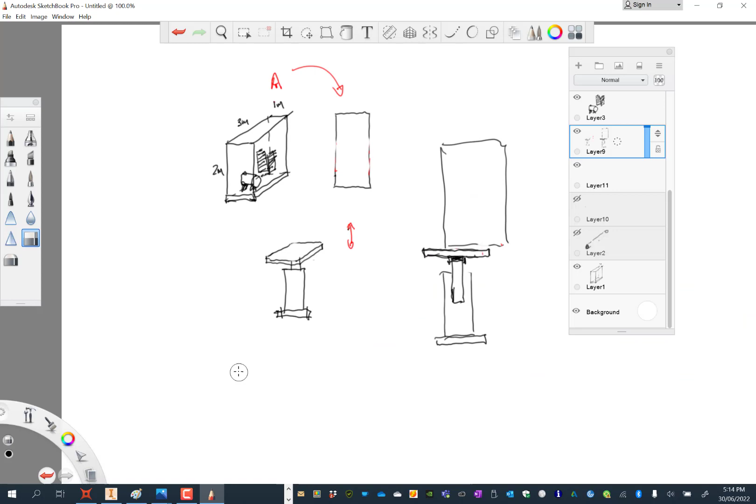So we're looking at one more way of finding the centre of gravity, this time just using a couple of scales. What I'll do first, let me just quickly review the different ways you can try to measure the centre of gravity practically. So we're going to learn a lot of mathematical ways to do it, but we'll have a look at some of the practical ways of doing it.

Let me just get rid of a couple of these layers if I can.

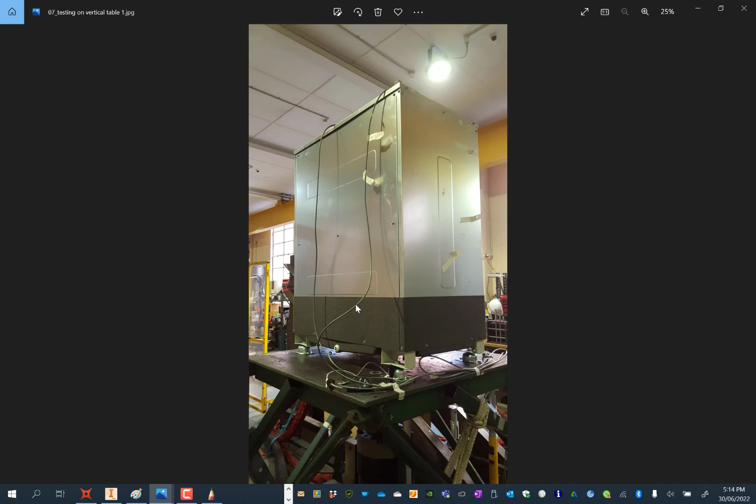Yep. So the first way we talked about, I did it with a phone box. I think it was my old phone box covered in duct tape. But you can put a roller underneath, and I've used this in the past when doing some earthquake testing. So just to give you a bit of background on that. And so what we do is we test these HVAC units. So that's heating and ventilation units.

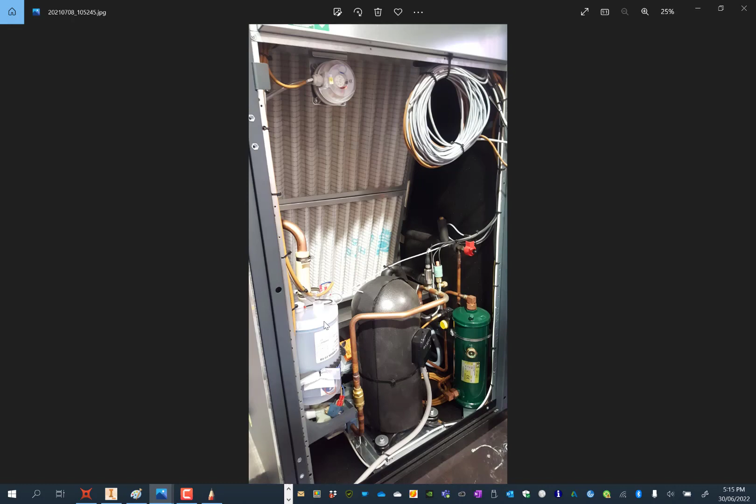And so what we do is we put them on a vertical shake table. So this table here, it's got a hydraulic ram underneath that shakes this up and down, and we use it to test whether these things will survive an earthquake or not. So one of the issues with those is that inside they're quite complicated. So that's the inside of this unit. It's got some filters that pass water through them for cooling the air, and it's got pumps and compressors and all sorts of things inside it.

And so you can't just assume that the center of gravity is in the middle of the box. You've got to actually find out where it is. And so one way you can do that is just the same as what I did with the phone box, the little box I was showing you on the video earlier. You can just put in there, let me just see if I can find the right layers.

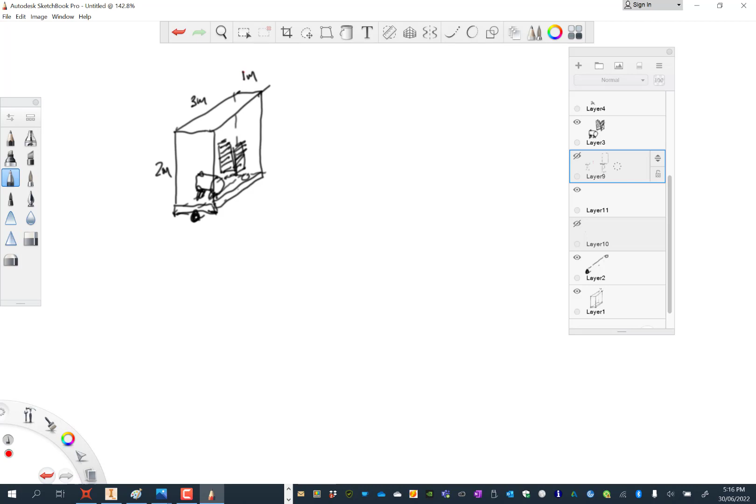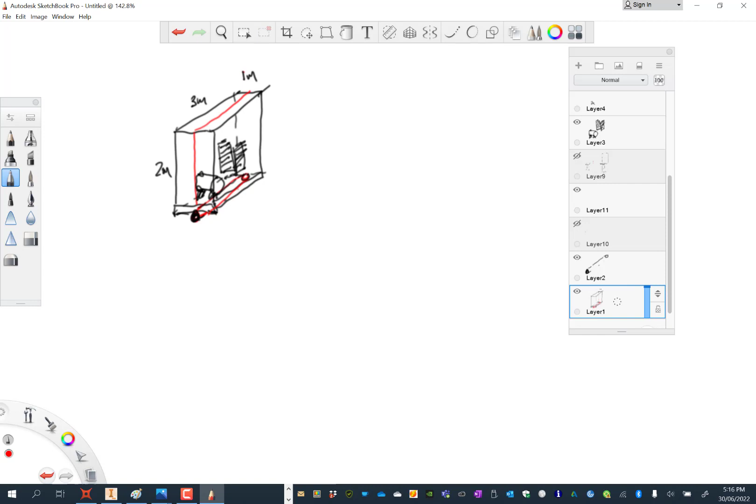Yes. And so you can put a roller underneath. So this is just representing the piece of equipment we're testing. So put a roller underneath that. This is the roller here. I need to select that layer. Sorry, I don't use this package very much. But you just put a roller underneath it like that. And then you just roll this backwards and forwards until you find the balance point. And then, just as we did before, you then know that your center of gravity lies somewhere on that plane.

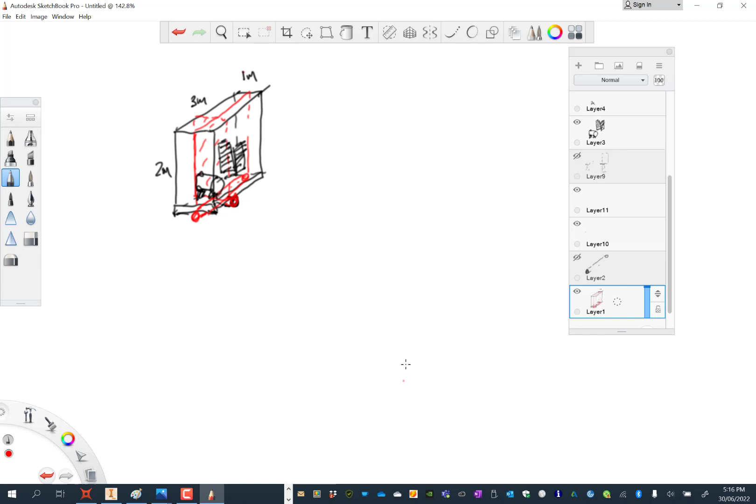Then what you do is you swap it around. Let me just see if I can find the one. There we go. So then you swap around, got another roller underneath the other way. Then you know the center of gravity is somewhere on this plane. And what we're trying to do in this problem is to find the center of gravity on plan.

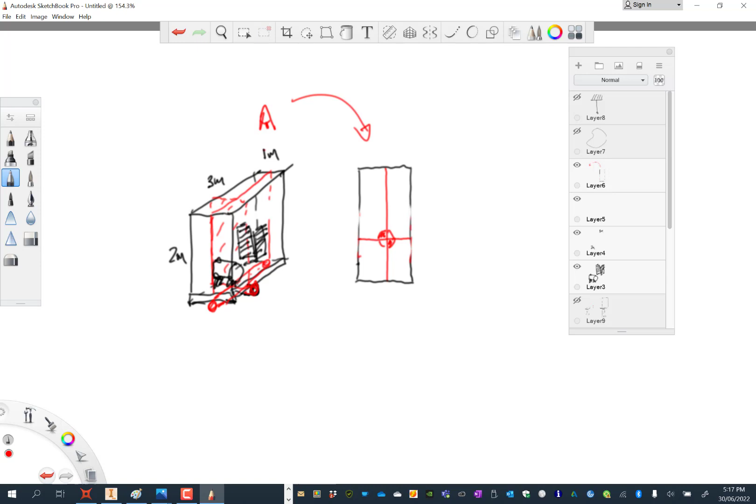So let me just see if I can find the right layer. So what we want to do is, if we're looking down on top of this, and we found those lines with the rollers, the center of gravity is here somewhere. And so I want to find the center of gravity on plan like that. The reason we want to do that is because we're going to put this on top of the shake table. Just bring this in a bit. So we're going to put it on top of the shake table.

Just get this flat. So this is the shake table, so you get your table like that, the ram underneath, and it doesn't have any supports other than the ram itself. The ram is holding everything up. And so if you put the center of gravity in the wrong place, and suppose your center of gravity is here somewhere, then the force from that unit is going to be coming down here. You're going to have a reaction from the ram over here.

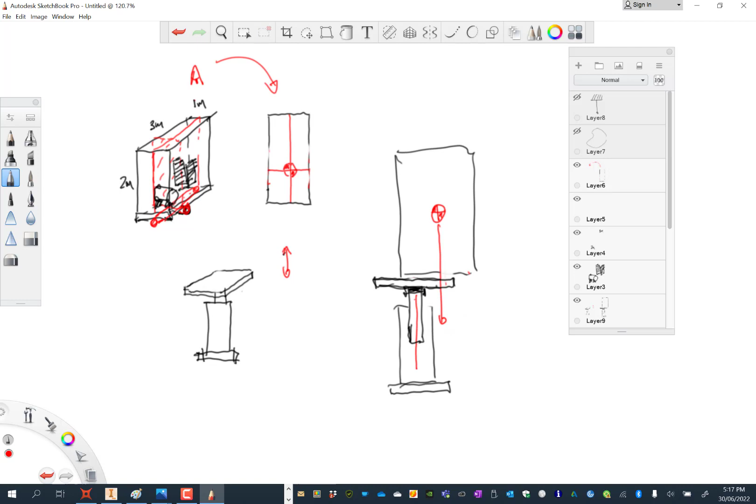So just as we were talking about before with resultants, you've got a lever arm, so you've basically got a couple, and therefore you end up getting a moment. And what that moment does is it puts a strain on the rod for the hydraulic ram. That rod's moving up and down to shake the table, and it'll wear it out on the sides where it runs through some bearings. And so we don't want to do that. So we want to find out exactly where that center of gravity is, so that we can make sure we're putting it square onto the table.

So that was the first way of finding a center of gravity. Just put a roller underneath, roll it backwards and forwards, find the planes, and then do it in another direction, find an intersecting plane, and then you can figure out where exactly that center of gravity is.

Obviously, we can't find the height of the center of gravity because we can't turn this on its side and roll it sideways. Usually you've got quite a stiff base, but the sides usually aren't very strong. But for this, it doesn't really matter where it is height-wise. You just have to make sure that you're putting it on the correct place on plan. So that was those.

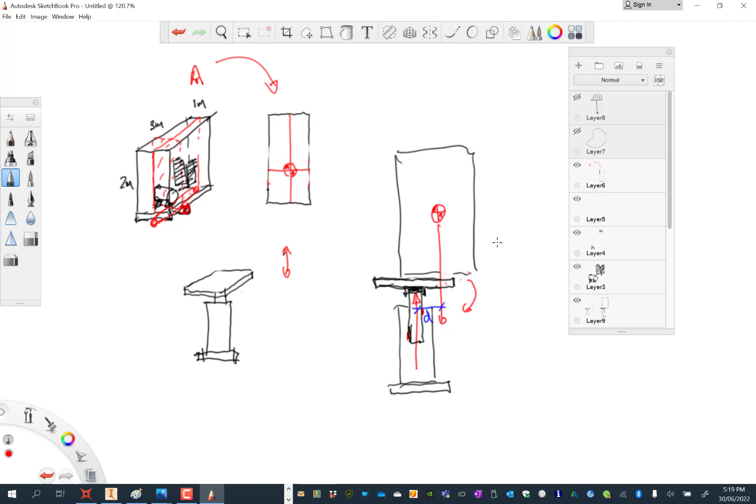See if I can turn all that stuff off. Interesting. Excuse me. Try and find them all to turn them all off. Come on, disappear. There we go.

Okay, the second way of doing it was to hang the object. Let me bring this round. So you hang this object one way or another, and then what will happen is, let me just see if I can get this to work. Not on the right layer, maybe on that layer. Why is it not showing me my dotted line?

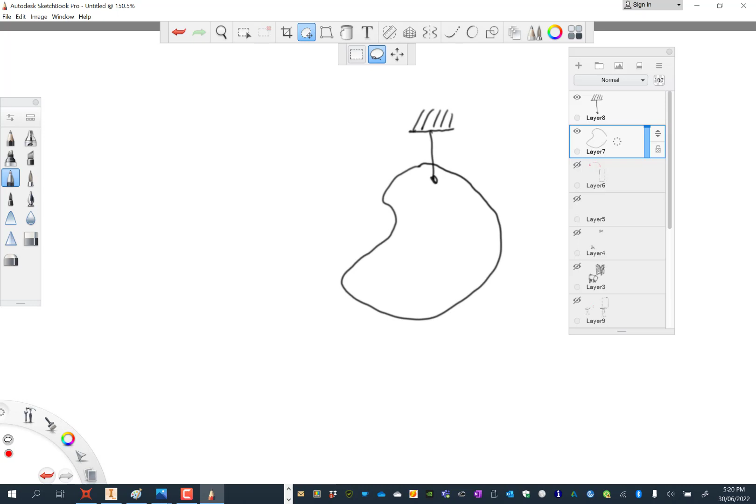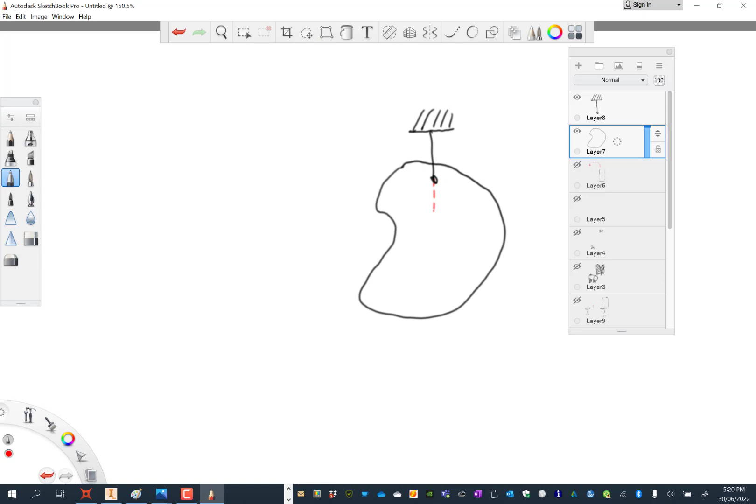There we go. So if you hang it from a particular point, it'll rotate around until it finds its balance point, might be around there, and then you know that the center of gravity must lie somewhere on this line, because it'll always rotate around until the center of gravity is underneath the support point.

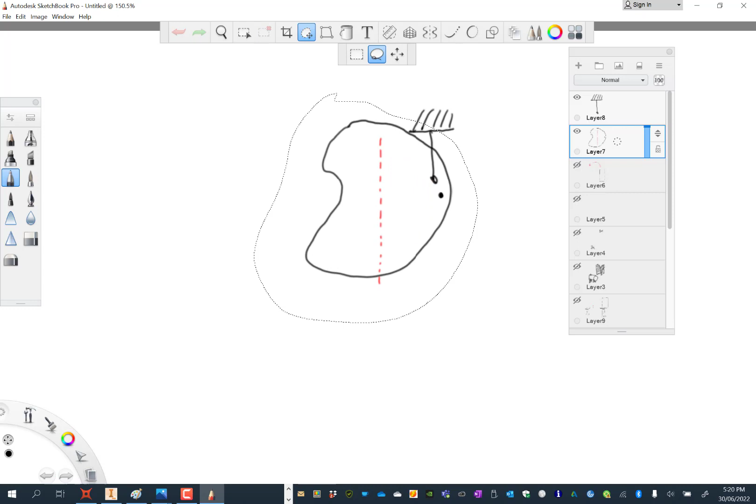Then you would choose another point to support it from, and you would attach it from there. And again, it would rotate around. Sorry, I'm not very good at choosing my center of gravity. So it would rotate around until it found its balance point again. So then you'd know the center of gravity must lie on this line.

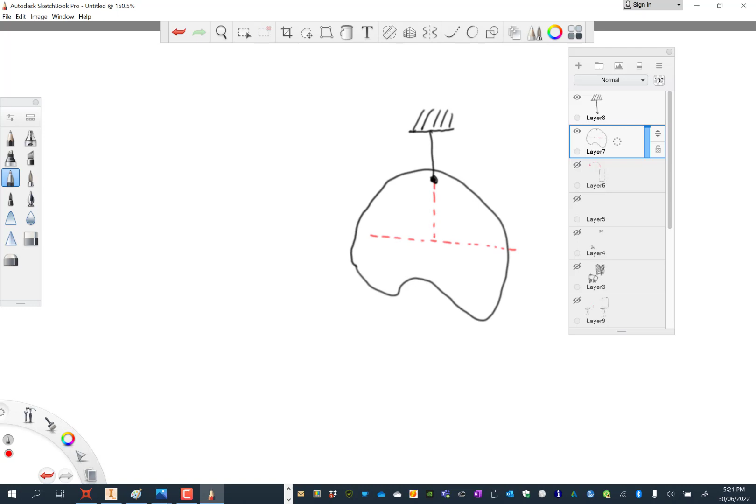What do I need to do? Get rid of that. So the center of gravity must be under the support point. So now you've got two lines that cross, so you know your center of gravity must be in here. And you find your center of gravity.

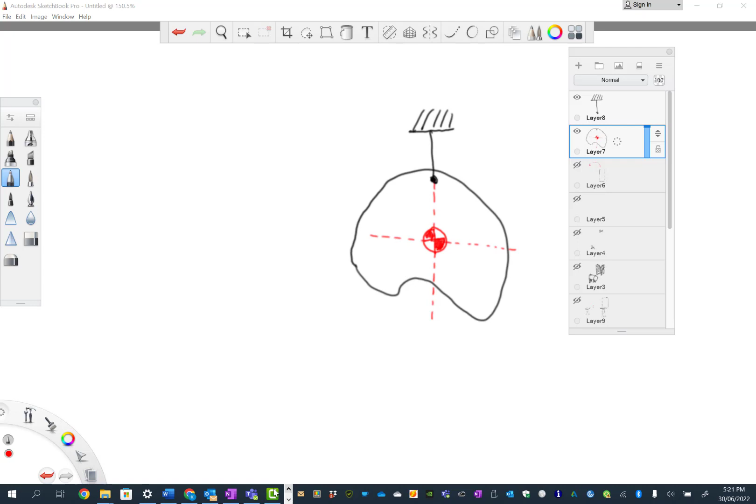So one other way we can find a center of gravity is to put a couple of scales on it. So this one here is this beam that we used as a test rig down in the labs. It weighed about a couple of tons altogether. The issue we had with that was we didn't have much headroom. The lab is not all that high. We were lifting it this way. The little head was downwards.

And so when we were putting it in position, we didn't have much space between the hook and the beam. Usually, if you did have a bit more headroom, you'd have your hook up here and you'd bring your slings down to lift it up. And that way it's not quite so critical where the center of gravity is. You can kind of move the hook back and forward along the slings until you find that right point.

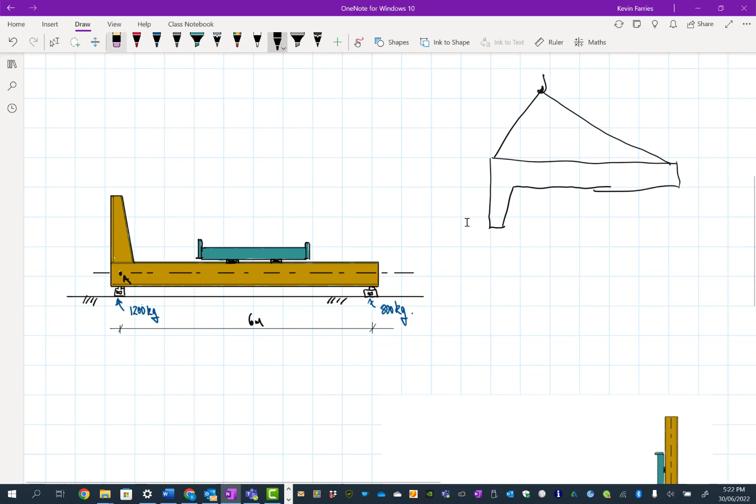Because we had so little headroom, the hook always needed to be quite close to the beam, so we couldn't really use big slings, so we could only really attach at one point. And to make sure it rotated flat when we lifted it up so we could get it into position, it actually sat on top of a couple of rams as well. We needed to make sure that the center of gravity was exactly under that hook. So we had to make sure we had a lifting point here. So what we needed to do was work out the center of gravity.

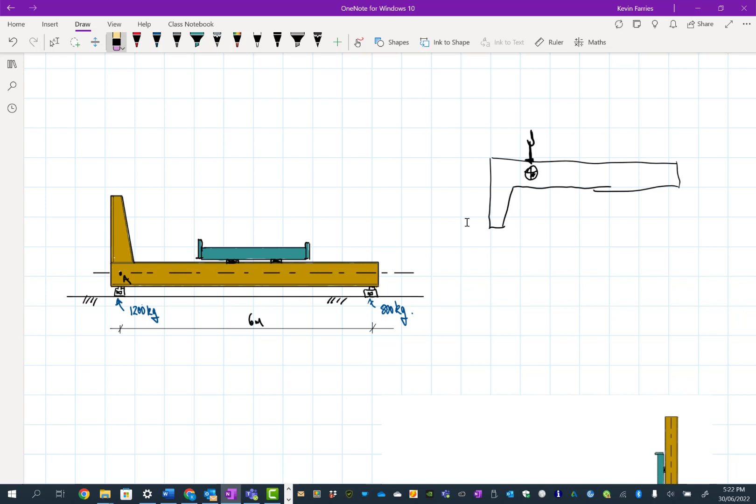What I actually did was make a model of this in Inventor. That's one of the drawing packages. It does a lot of other things as well. Inventor is quite a handy software package. But failing that, what we could have done is just get a couple of scales. It could be load cells or scales, just something to measure the weight of this beam.

And so that's what I'm imagining here. We put the scales underneath and they're reading out the weight. Although it's reporting in kilograms, it's really measuring the force, it's measuring the weight. And so we've got a couple of reactions here.

So we've got, I'll just draw those on. And I'll actually change them into newtons, a bit more correct for engineering rather than showing kilograms. So 1200 kilograms, 1.2 tons, that's 12 kilonewtons, if you assume gravity is 10, so roughly 10 meters per second squared. And this one over here, that one is 8 kilonewtons.

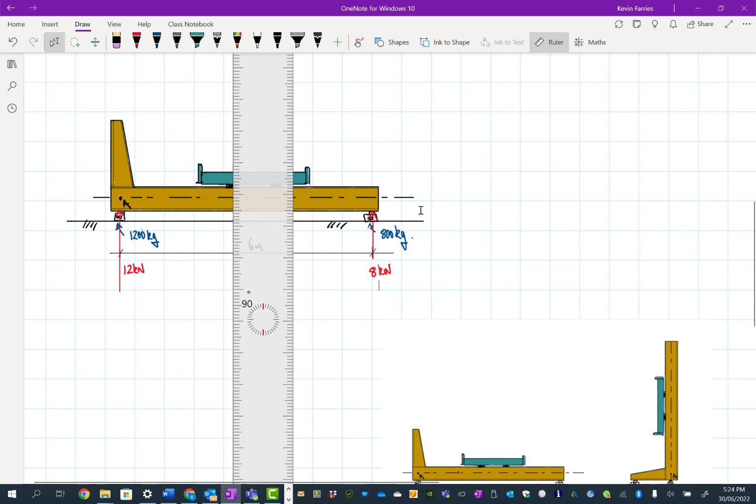So what we can do now is the stuff we'd done previously. We can find where the resultant force would be. We could choose any point to do this around; we'll do it around A. So what we'll do first is figure out the resultant force. So sum all the y components in this case. We'll probably take y upwards, just make everything positive. Just delete this one. So just tidied that up a little bit.

So, yep, we're finding the resultant. We need to find its position, and then we're going to use the fact that the resultant is going to go through the center of gravity. That's what the center of gravity means. So we could replace these two supporting forces by a single force, and it would balance at that point. So we've only got y components. Just let me get the right pen.

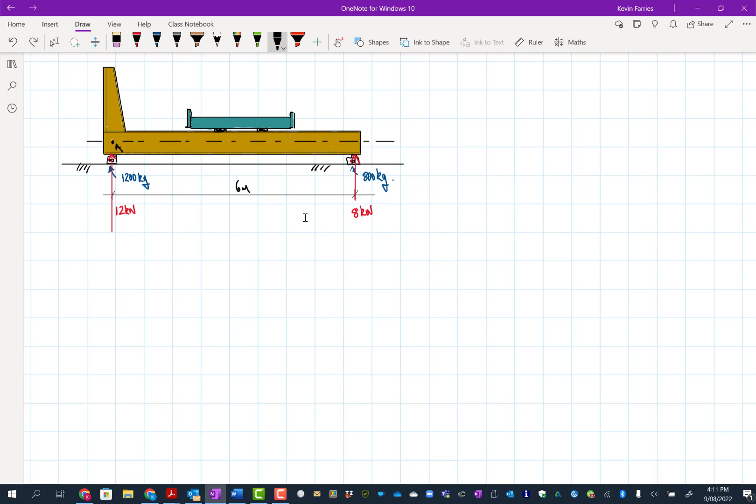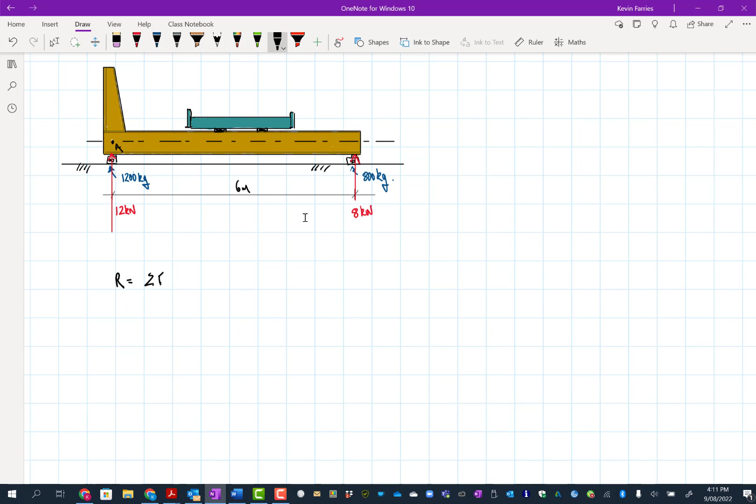So therefore, we're going to have some resultant going through a point. Let's just call it R. The magnitude of R is simply going to be adding up Fy. We don't have any Fx's. So we're going to have 12 kilonewtons plus 8 kilonewtons, which is equal to 20 kilonewtons. So we know the magnitude of R. Just going to move things around to keep things tidy.

Now, we could replace these two forces with a single force R. We need to know where it's applied, so we're going to look at the moments of these two forces about the point A. Could have chosen the point B, but we're going to take it about A. So the sum of the moments is equal to, let's call this F1, call this F2, F1 times the lever arm to F1 plus F2 times the lever arm to F2, which is going to be 12 times, now that's got no lever arm, there's no moment associated with that because that force goes through the point A.

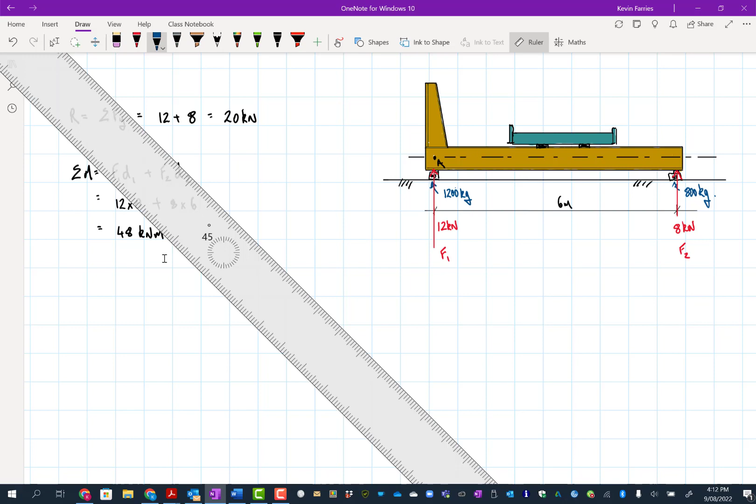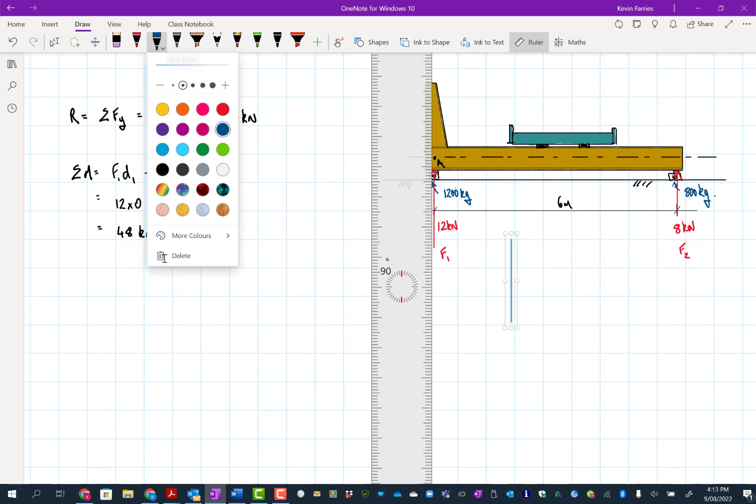Then for F2, we're going to have 8 times 6. So the total moment is going to be 48 kilonewton meters. That 6 is in meters and the force was in kilonewtons, so it's 48 kilonewton meters. Then we're trying to find where R is going to go. We know that R is equal to 20 kilonewtons. Let me just draw it out of the way first. I'm not doing any of this to scale. Just changing the thickness of that. R equals 20 kilonewtons.

We don't know where it is at the moment, but we've essentially got a reaction force and a moment about A, so we can figure out the position that R would need to be in to create this moment. What I should have done was also write down the direction of that. This moment here, 8 times 6, is going this way, so it's anti-clockwise. And R is going up and it's going to be going in the same direction, so that's going to work out fine.

So R times the lever arm to the reaction has to be the same, that 48 kilonewton meters. That means R, which was 20, times that lever arm dR must be equal to 48 kilonewton meters. So dR must be 48 divided by 20, which is 2.4 meters. Just checking back through that to make sure I haven't done anything silly. It looks okay.

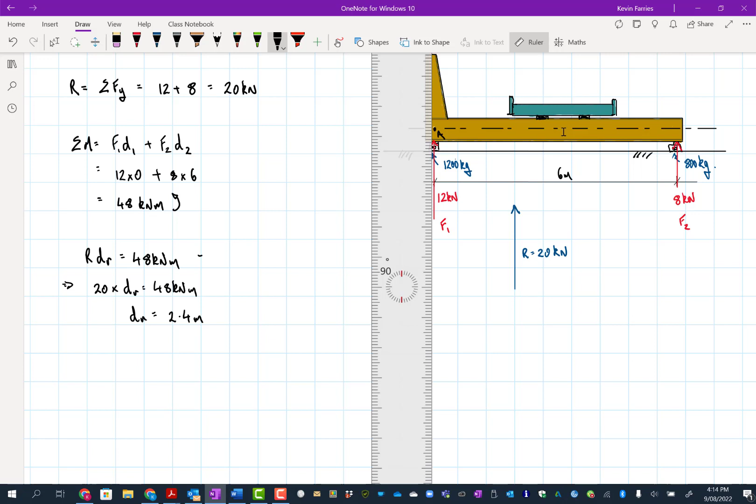So we know that the 2.4 would be about here somewhere. So that's where the resultant is. The resultant's the balance point. What you're basically saying is that this force could replace these two forces, so you could have this just balancing on this force at that position. It also means that the weight goes through that point, and so our center of gravity must be here.

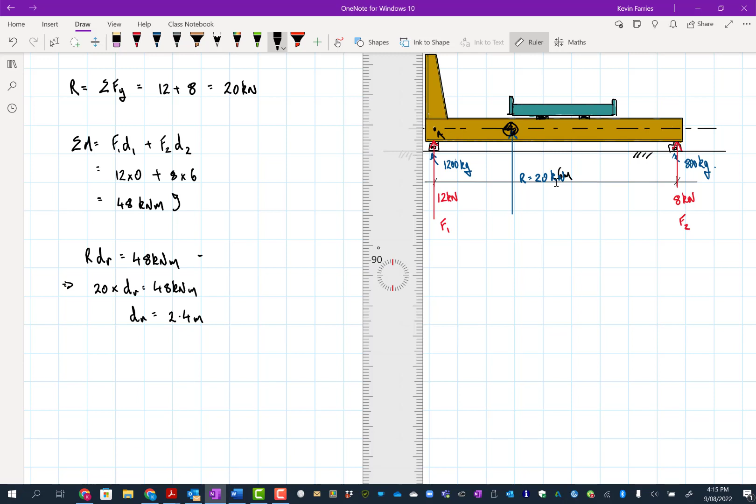And so therefore, just checking what the question was asking for now. So the center of gravity must be 2.4 meters from A. Done. Cool. Next problem.